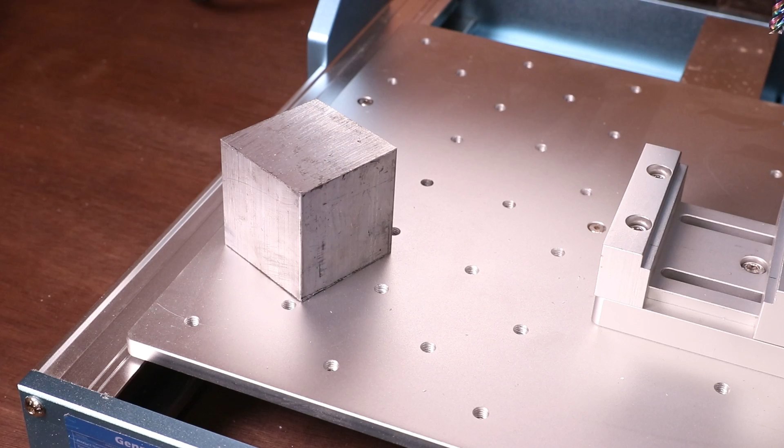Ready to learn how to turn that into this? Well, let's get stuck in.

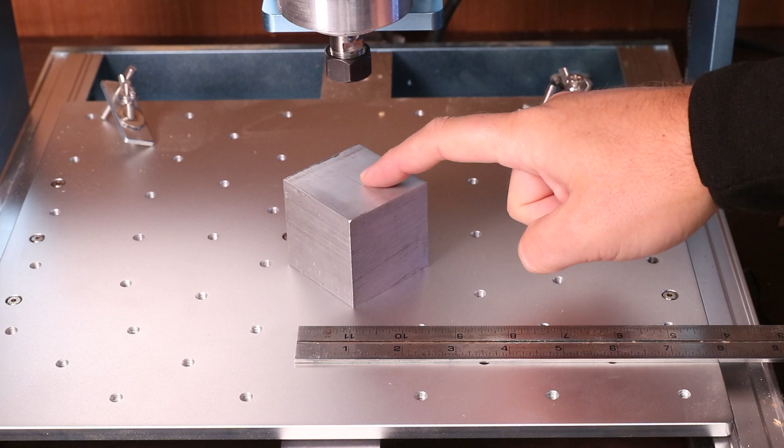So this is the block of aluminium we're going to be working with today. It's approximately 2 inches wide, as we can see against the ruler there, but there are a few things we need to do before we even start machining any of those holes. The first is, do not make any assumptions. Do not assume that all sides on this block are perfectly parallel, and also do not assume that this is a perfect cube. It's actually not. Some measurements are about 0.5 millimeter out.

So the second step we need to do really is to counteract those things that we just mentioned in order to get this to be a perfect cube. So we're going to begin by surfacing every side of this cube, just taking a skim off about 0.2 millimeters, just to guarantee then that all faces are perfectly flat and also parallel with each other.

Then after we've done that, we will take the measurements of what is remaining and make it into a perfect cube. So let's say one measurement is about 0.3 millimeters longer than the other, then we will take 0.3 millimeters off that side in order to get it perfect. Now, the more accurate you can be in this process, the better results you will get at the end once we start machining all those inner parts out. So let's get this set up and start getting it faced.

Now, in terms of holding your block of aluminium, there are obviously multiple clamping methods you can use to hold this in place. Today I am using this device, which is called a low profile vise. It has multiple holes where it can be held down to the bed itself, as well as adjustable jaws that you can adjust depending on the material that you are holding. When you are working with blocks of metal, these are brilliant.

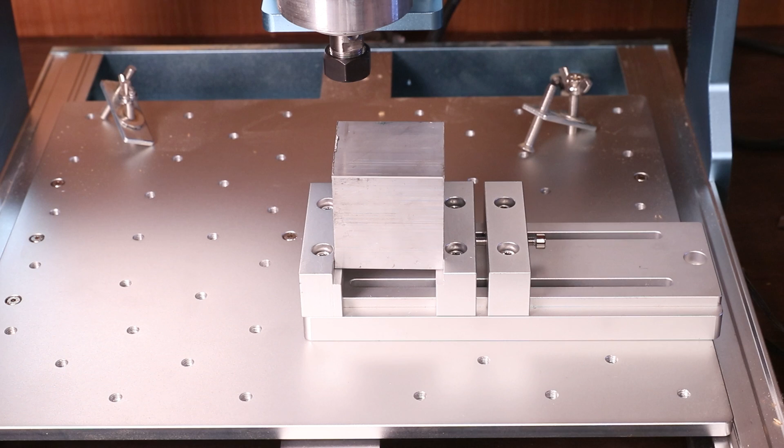They're about $50, but it is well worth the investment. And this is what I'm going to be using today, as I say, because ultimately it just makes life much easier when we are machining blocks of metal. So I'm going to get this set up and locked in place now.

So the aluminium is held in place nice and secure. The bit is set to the 0 at the dead center of the material. We achieved this by doing 2 diagonals from corner to corner, and it gave us the dead center in order to begin the job. Now we are about to take 0.2 millimeters off the top of this and ultimately surface the top of the cube.

In terms of creating a file for this, it is relatively simple, but obviously will vary between CNC software. So what you'll want to do is draw a square slightly bigger than the area you're going to surface. So in this scenario, this is a 2-inch square. We drew a square that was 2¼ inches. Now the reason for this, it just guarantees that it's going to catch every edge and not leave any corners. So it will go slightly bigger than the area, but it will mean it machines the entire top surface of this cube.

Now, in terms of rotating this round, there is a certain order we will do it in, and I'll talk you through it as we do it. But ultimately, the first thing we need to do is get one surface completed and faced. So with the top now surfaced, we're going to flip this 180 degrees so the top becomes the bottom, and I'm also going to mark on the vise where it's sitting, just to make life easier in terms of repetition and the cuts going forward.

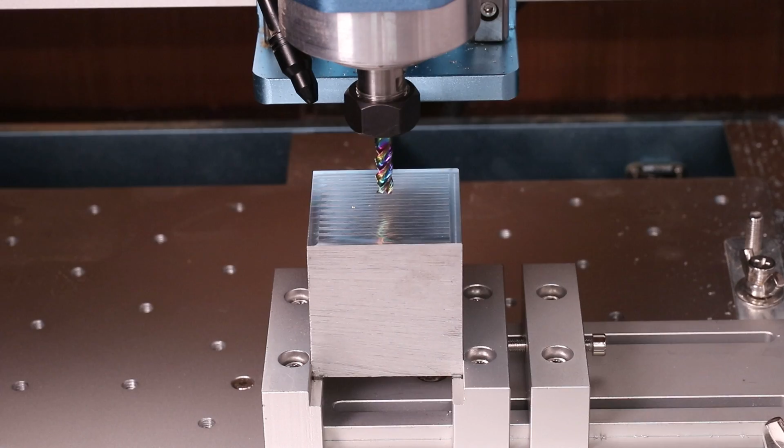So let's continue and get the second face done. So we now have 2 sides that have been faced, the top and the bottom. We're going to flip this around so those 2 faces sit within the sides of the jaw. And with that done and the 0 reset, we'll go again.

So now we have 3 sides done, the left, the right and the top. So we're going to flip this over 180 degrees, so those sides stay within the vise and the bottom one goes at the bottom of the vise.

And the same, let's go again and get the 4th side done. So there's only 2 sides that have not been cut now, the front and the back. So we're going to flip it one way, do that surface, then 180 degrees over the other way to get the other one done. So there we have it, all 6 sides have now been faced.

The next step is to take this out, check some initial measurements and see how far off this is from a perfect cube, and if necessary then just take a little bit off 3 of the sides to make sure this is as close to perfect as we can possibly get it. I'll show you how to do that now. So this next section does require a little bit of math. Don't be too put off by it, but ultimately the more accurate we can get this, the better the results are going to be at the end.

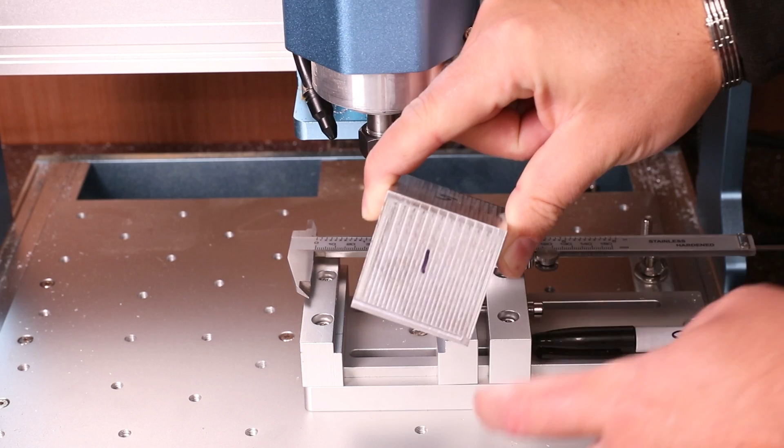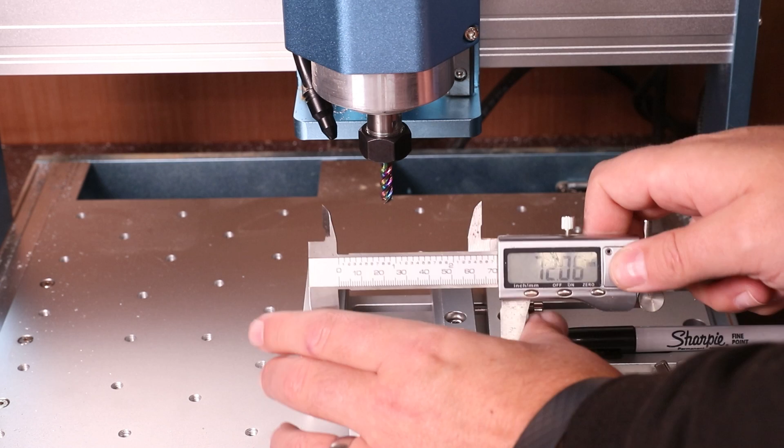So what I've done is marked the cube up with 1, 2, 3, 4, 5, 6 all the way around. It doesn't matter what side you mark them, as long as you remember the pairs. So in this scenario, 1 on the front, 3 on the back, that is a pair. 4 on this side, 2 on that side, that is another pair, and ultimately 5 and 6 become the third pair. So what we're going to do now is take the measurement for the 2 and 4 pair. So we're going to bring the calipers in and we're going to take the measurement for 2 and 4.

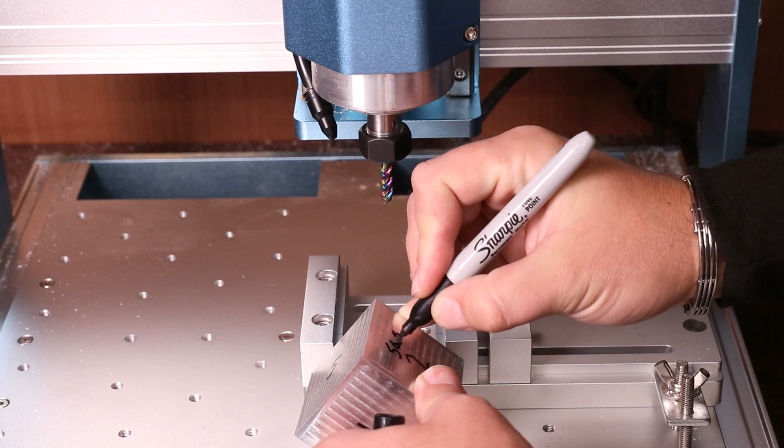That is coming in at about 50.81. For ease for this video, we're going to call that 50.8. So on that face, we're going to put 50.8. Excuse the scruffy writing, but it's just as a reference so I know what it is. Then we're going to spin that one round and we're going to do 1 and 3 now. So we're going to bring the calipers back in and that is coming in at 50.19. So again, for ease for the video, we will call that 50.2. So if I mark that up and go 50.2. Now what we know is between those 2 sides there is a 0.6mm difference.

If I flip this over now and do the final set, the 6 and the 5, we have approximately 50.7mm. So again, mark that one up. So after we have done all the 3 measurements, now we have 50.2, 50.7 and 50.8. So we know that the 2 sides are bigger than one side. So we want to try and get the other sides down to 50.2. So on the 50.7 side, we will need to machine off 0.5mm off this face. On the 50.8 side, we will need to machine 0.6mm off this face, and that should ultimately get them both down to the same as the remaining pair.

Now what I will say at this point, in theory these sides should all be parallel, but if I show you something and bring this in, at this point we're measuring at the back of the cube, that is coming at 50.59. Now if I bring it to the front of the cube, that is 50.76. So what we can see is, although these should be parallel with each other, there is some discrepancy. So take multiple measurements and ultimately work off whatever is the largest of the measurements when you are doing these checks and your calculations. And then, as I say, factor that in as part of your measurements.

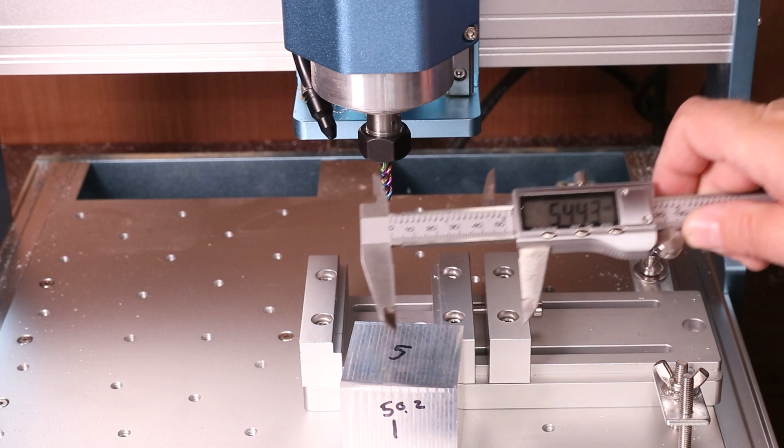One final tip I should also mention is that after you've done all the machining on the side, you may notice some of the edges have a little bit of a burr on them. So before you start bringing your calipers in to take the measurements, make sure you get rid of those little burrs, as it may affect the actual measurements that you're taking.

So with everything in place, I'll try and explain what I just said about setting it from the base. So normally this level here would be your 0, so the bit at the moment would be 5mm above the height of the 0. But what we can actually see on the screen, it is shown as 55mm. That's because I set the 0 as this little ledge here. I lowered the bit down and set it off this little ledge, and I've told the software that as well.

Now this, as I say, is just one way to guarantee getting perfect thickness of material, as opposed to keep setting it from the Z height, because ultimately every time we rotated that cube round, it is a slightly different measurement, whereas this method, we're setting it consistently off this ledge in order to achieve a guaranteed thickness every time we rotate the cube.

So a bit like we did earlier, we're now going to flip this over and machine one of the other sides, as I say, to get that pair down to 50mm as well, and then we'll do it a third time, and all being well, after we have machined all 3 pairs of sides, it should then give us the 50mm cube that we're after.

Now, I have no issues with pointing out my mistakes on videos, and what we can clearly see here is it machined probably just over the first 3/4, and then it drops off because obviously something wasn't quite square in what I've done. So what I'm going to do now is reset this file to take a little bit more off. Instead of bringing it down to 50mm, it's probably going to have to come down to 49mm in order to get this last little bit off and ultimately try and keep this as square as possible.

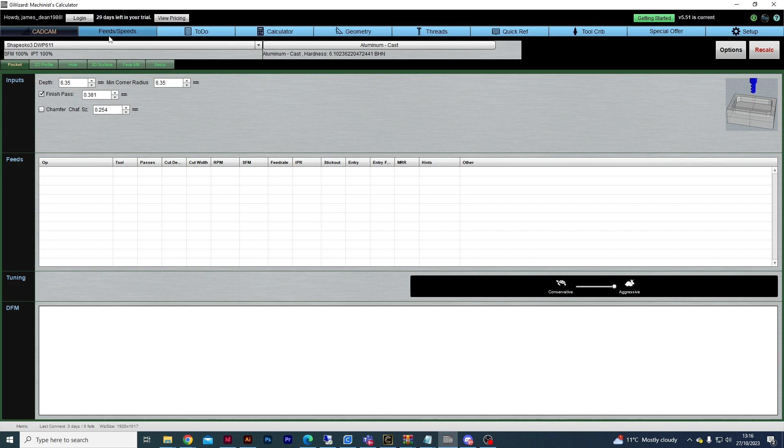Now, when you load it up, it will look something like this. As I just mentioned, it is ideal for CNC people. There are lots of different features in here, such as feeds and speeds calculators. I will point out this is designed for larger machines, not smaller desktop machines, so the feeds and speeds may not necessarily be accurate.

Now, the tool that we are interested in is the geometry tab up here in the middle. When you load this up, you'll see there's lots of options again available for calculating things, but what we want to do is come to the cube option, and this will ultimately give us the dimensions that we need for creating our Turner's cube. You can see an example up here in the right hand corner of what one should look like, and then we've got the calculator going on here.

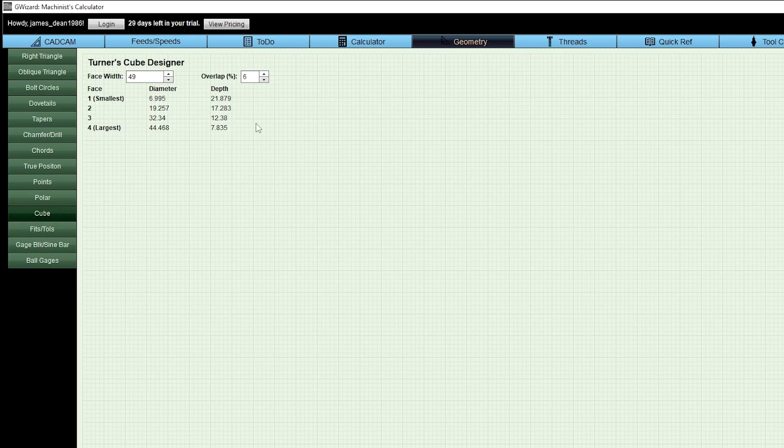Now, you'll see my measurements have already been put into this from when I was testing it earlier. So after completing the machining on my cube, it came down to 49mm. The first thing I will point out, this is just a calculator. It doesn't matter whether you are using millimeters or inches. Put your measurements in and it will calculate them regardless. So mine was 49mm, so I've inserted 49, and we have an overlap set in here.

Now what the overlap is about, if we look over to this cube in the corner, you'll see that where the corners touch, it is calculating that and working it out. The smaller the overlap, the tinier the overlap will be between the corners of the cubes. You can go too far and ultimately make this very fine. I have done some testing and 6% seems ideal for me, but if you want to play it safe, maybe start at 10%. Just as an example, I will adjust these numbers and you'll see all the calculations move down here. Again, with the overlap, it changes the depth of the cutting.

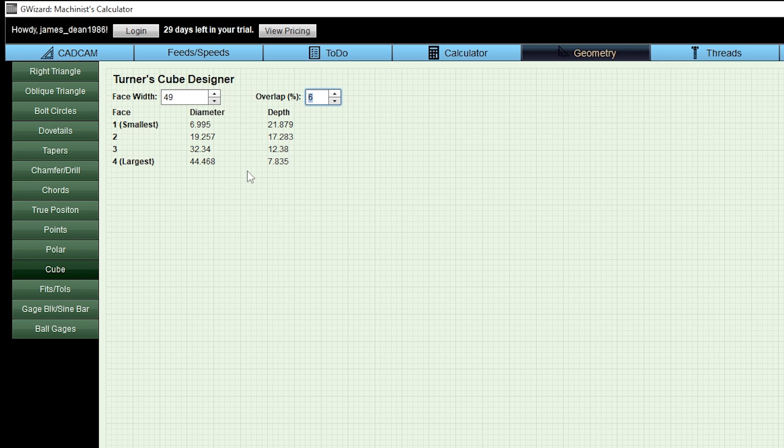Now what we need to note from these ultimately is both sets of numbers. We are going to be creating 4 circles cutting at different depths, and ultimately we just marry the numbers up. So the first circle we will create will be 44.4 millimeters in diameter with a cutting depth of 7.835. The next circle will be 32.34 and so on with a cutting depth of 12.38, and you'll do this for all 4 circles. Now to show you what I am talking about, I have mocked this up in a 3D model. If I just load this up now.

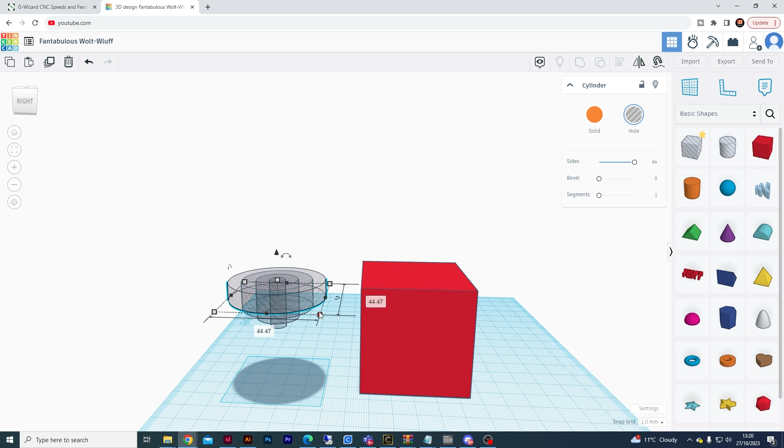And what we can see is the cube we are working with, a 49mm cube, and the holes that we are going to cut. So as I mentioned, when in your CNC software, you will just design one circle straight away. And mine had a measurement of 44.468. It rounded up to 44.47 in this scenario. And with a cutting depth of 7.84.

And then you would do the second circle, the third circle, and the fourth circle, as we can all see mocked up here. Now I am doing this in a 3D environment just to show you. You don't necessarily need 3D software to do this. It is purely for illustration purposes and also so we could actually test that everything was working.

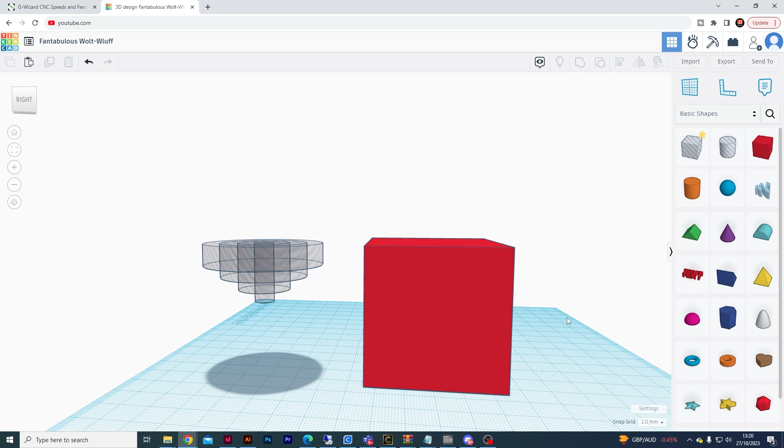So once you've then created your 4 circles, ultimately it's about machining this 6 times on each side of the cube. Now if I move this screen over slightly, you'll see one that I mocked up earlier on. And ultimately we can see this is what we are aiming for. It is just that set of circles machined 6 times on each side.

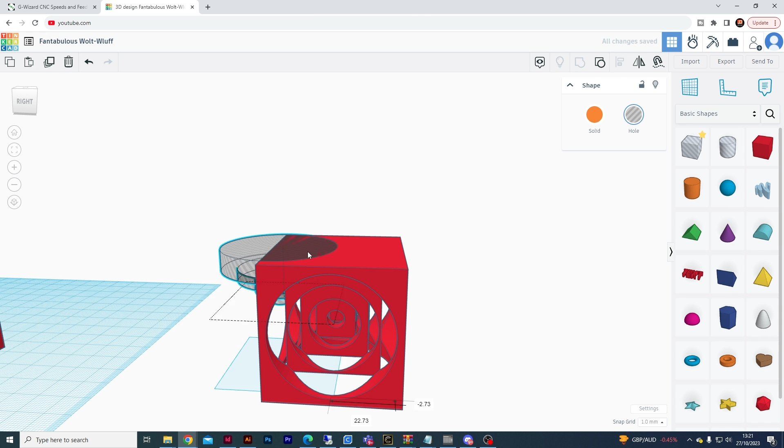If I ungroup this, you'll start to see what I mean. So if I ungroup the shape, we can then see the top one there. And if I move that out of the way, you have an indication of what we have just created and the way it works. Now if I undo that and put it back in place, hopefully you can start to see it makes sense in terms of the grouping and the cutting.

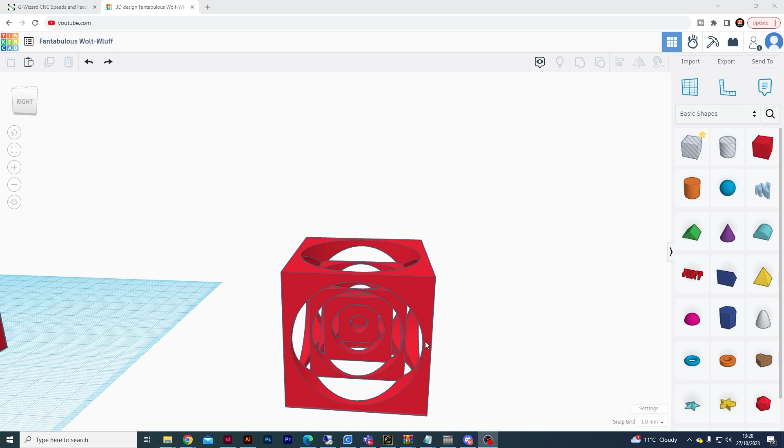So whilst overall this looks very complex, it is essentially just machining 4 different circles on top of each other on all 6 sides of the cube. And if you are curious what this actually looks like within CNC software, then let me open up Carveco Maker. And as we can see, it is just 4 circles, as I've already explained, just with a different depth for each one. So the first one, 0 to 7 millimeters, number 2, 7 millimeters to 12 millimeters, number 3, 12 to 17, and so on.

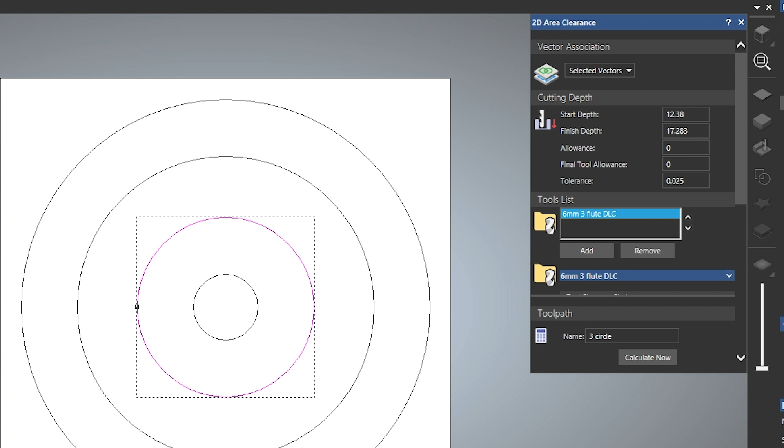And when you actually simulate this in the cube or in the material itself, obviously it will just show as being done on one particular surface, and it's all about repeating that 6 times on each face of the cube. So let's jump over to the CNC machine and start this. Now we are sort of on the home straight now. We just have one more job to run. We've just got to run it 6 times obviously for each side of the cube.

Now I can't stress enough at this point, make sure you are as accurate as possible for setting up this last part of the job. If you're struggling to find the center of your cube because of having a big bit, swap over to something like a V-bit as I'm showing on screen now in order to find that center point, and then swap it back out for your aluminium cutting bit, just to guarantee you are dead center on this particular block.

You will also notice I've got a clamp in place down in this bottom corner. The reason for this is to keep setting the X and Y on every time I change the cube. It means I can just take it out, flip it over, slot it back in, and once it hits that, I know it's going to be in the correct place. We did it earlier on with pencil, but for now we need to be as accurate as possible, and this is just going to work because it is a dead stop for every time the cube hits it. So all we can do now is get all of these circles cut in the first one and then flip it over and start doing the rest.

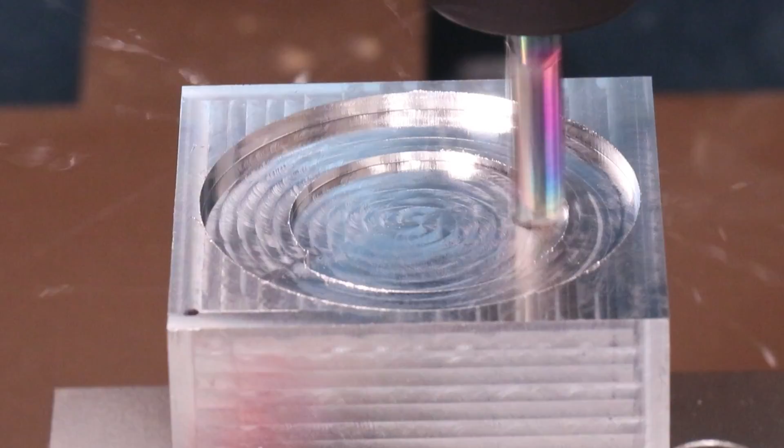So we've machined the top side now, we've just flipped this over and we're going to continue to machine the same in all 5 sides. So having now done 2 faces and starting to gain the breakthroughs in between the holes, I can see that one side of the connection is a little bit thin on the inner edge here. I'll put it on screen to highlight it. So something must be slightly off in my measurements, or the positioning of the cube itself maybe is a fraction off. But ultimately I'm going to carry on and continue to get the other 4 sides done.

So it does take a little bit of work, but it really dials in your skills and you get a great piece at the end of it. Now, is this perfect? Not a chance. There are quite a few flaws and imperfections in this, all down to user error, some slight miscalculations, and it also did come loose in the vise at one point. So yeah, it is not perfect. I may even do a second one to try and improve it, but the bottom line is it's come out really nice, really shiny, and I'm happy with that for my first aluminium turner's cube.